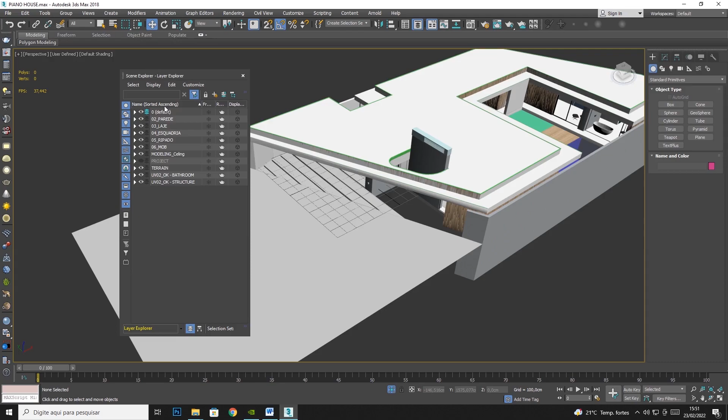It's really interesting to work in an organized way. So let's get started. First thing, we can put everything inside the default layer. We can erase all of the incorrect layers. Let's get started, let's do it.

Let's select all the project, clicking and dragging. Look at this, this layer here is in blue, so I click on it. I can click both of them. That means the layer that I'm selecting, that is selected, if I create something here or anything here, this object will be created inside this layer. So this layer here is going to determine where I'm going to copy things.

So let's select this default layer, click on it, and then click right here, because this button is going to add to the active layer. Look at this, if I click here, this layer is active, so I click right here and that's going to add the objects to this layer. If I click here and click here, that's going to add the objects into this layer.

I'm going to close it to show that the things aren't in the other layer anymore. Right button, unhide all. Look at this, there's nothing to show, so I just erased the layer. Perfect, all the objects are inside here.

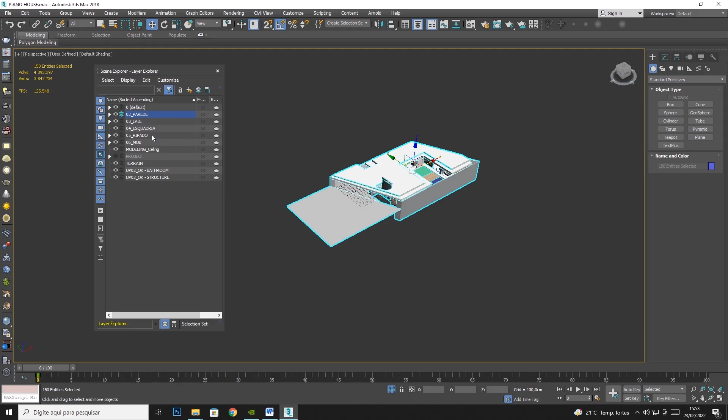Control plus Z, let's do it again. Okay, we got it back. Control plus Z. Look, I had these objects basically in all the layers, so you can see, I can click on it, the lining and everything.

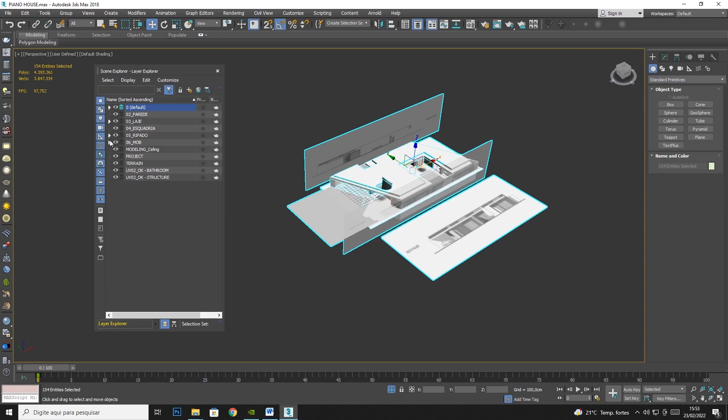So I'm going to select everything and put it right here inside the default layer. I select it and click right here, the button that adds to the active layer. Great, the objects aren't in the other layers anymore. I just don't know why we still have these little arrows here, but we'll check that out soon. Now that we don't have anything on these layers, I'm going to erase the main layer. Look at this.

Let's delete it. I'm going to teach you how to do it. Right button, delete. You can select more than one.

I can only delete if I don't have anything inside the layer. When I have this little arrow, I have something inside. So let's delete the other one. Right button, delete. Great.

Let's see what else we have. These three layers weren't deleted because we still have the little arrow here. Let me see what we have here.

Ripado - we don't have the object, so let's delete it. Right button and delete it. Right button, delete it. And the furniture...

Well, we don't have this, so let's select both and delete it. Control plus the other one we selected. Let's select both and delete it. Right button, delete it.

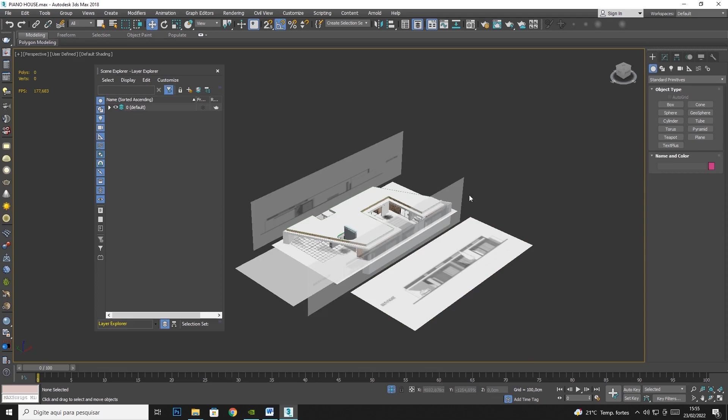Now I just have this default layer. Great, that's what we need. Let's get started organizing all the layers, starting with the textures that I used as references to model the project.

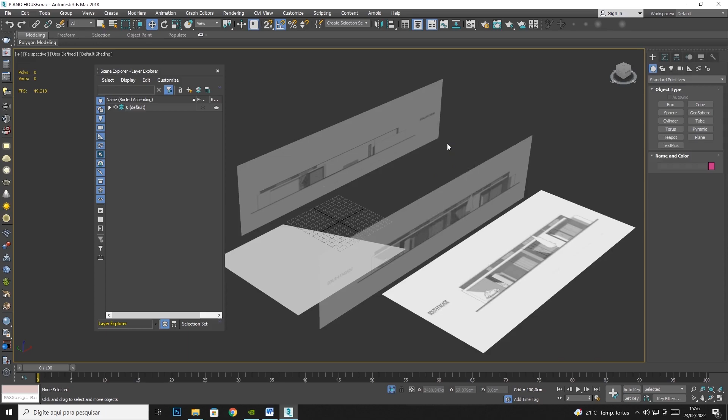I'm going to select more than one. Right button, isolate selection. When I click here, I only see the selections - just what I selected. Right button, unhide all, and I can do it again.

Let's select the textures here that I used to create this project. Then we can create a layer for them. Let's do it right now - select this, this, and this.

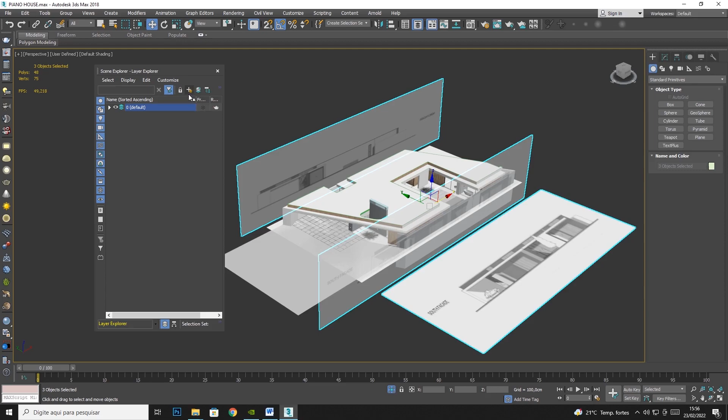We can click here, let's create a new layer. Now I'm not going to add, I'm going to create. So let's click here - yeah, we just created a new layer. Let's call it project.

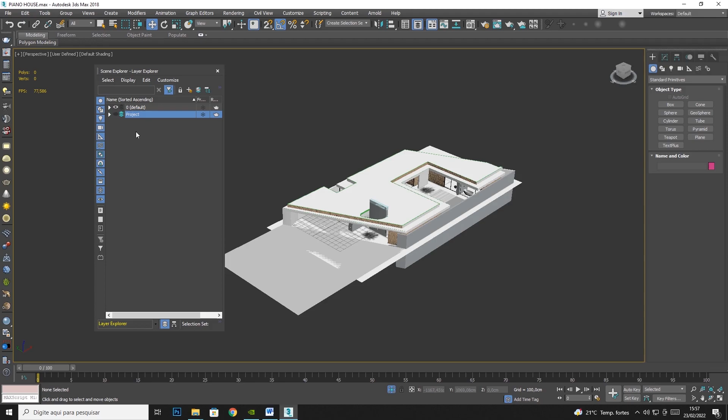Yeah, perfect, look at this. So I can hide the project, you know - so we just erased it. Let's see it like this.

We have another layer here. Let me verify this - right button, isolate selection, so that I can only see the object I selected. Okay, it's part of the project that I used to model, so let's add this layer here. Do you remember that? Click here so I can activate the layer.

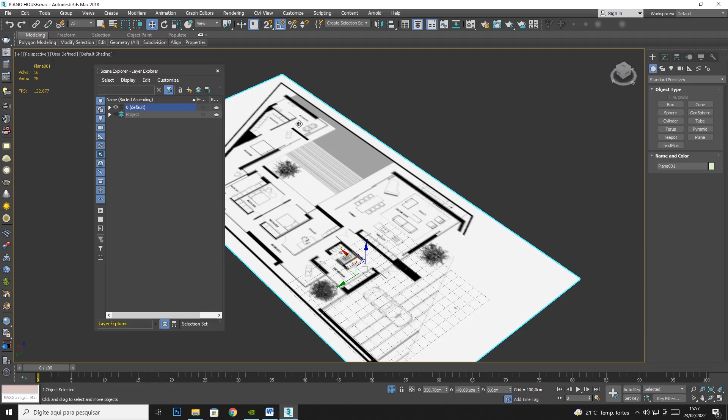Okay, I select the object. Let me make it smaller, and I want to add it to the active layer. If that makes sense, it's going to disappear because the layer is erased. Okay, so look at this, it has gone. So let me see.

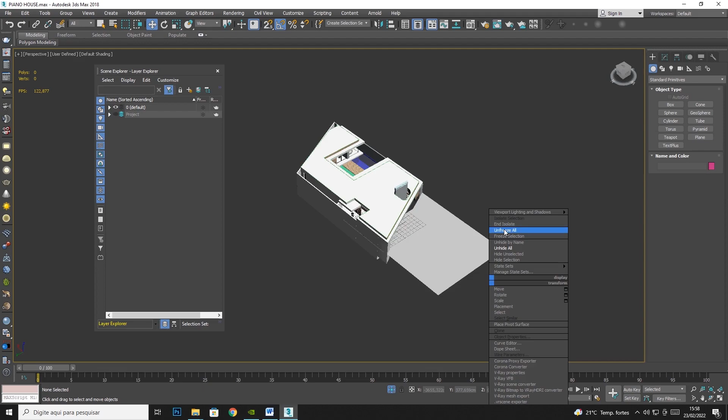Great, perfect. So now I have the project layer. Let's close it - right button, unhide all, or right button, end isolate. That makes the same thing. Let's keep going, organizing the file.

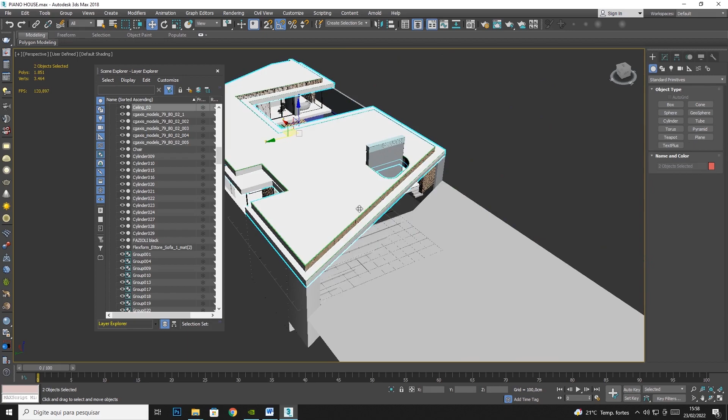Now let's select the ceiling right here, this one. With control, I'm going to select the one below, both of them. I'm also going to select this green element - we're using this to simulate the gutter of our house.

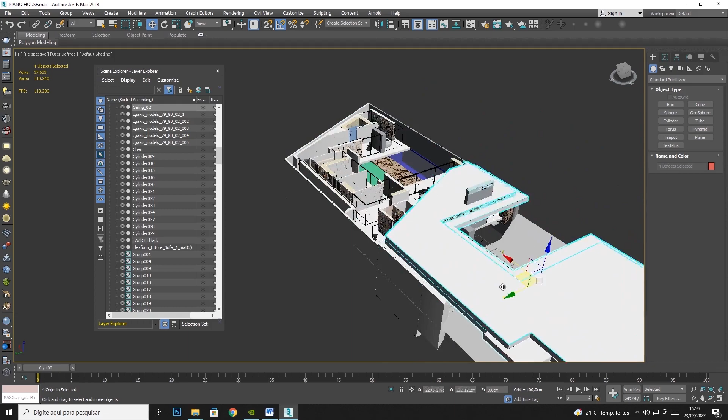All of this was ceiling. I think everything here I can consider ceiling, plus this element here - control, I can select this as well. Cool, let's create a layer for this.

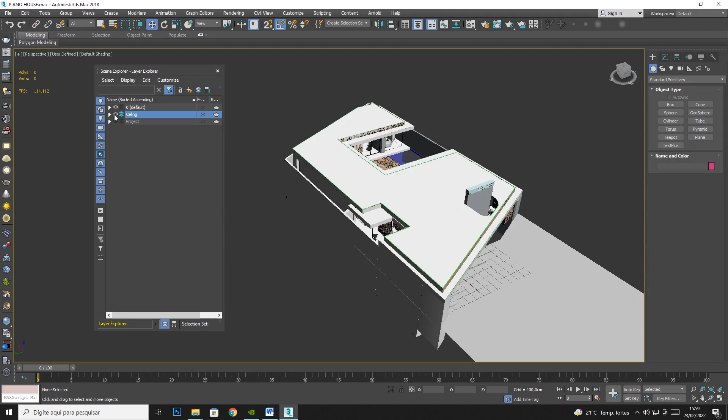I'm going to click right here, create a layer, and call it ceiling. Okay, let's write this - ceiling. Great, let's erase this. Now I can see or not see the ceiling.

Perfect, let's keep going. Another element we can create is the floor. We can select this little sidewalk, indoor floor, outdoor floor, the outdoor area that we're going to put grass on. Unreal, you don't have to worry about it now.

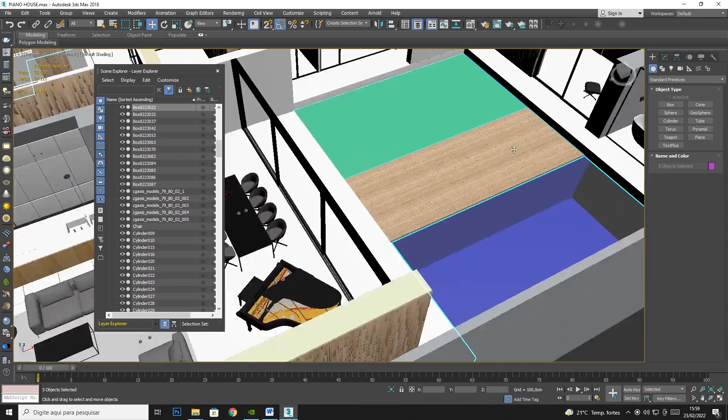We have this slided element that looks like an edge. Let's select this swimming pool, the water of the swimming pool, the area underneath the swimming pool. Let's see, everything's there, let's remove this. Look, I think of floors, I think it's okay.

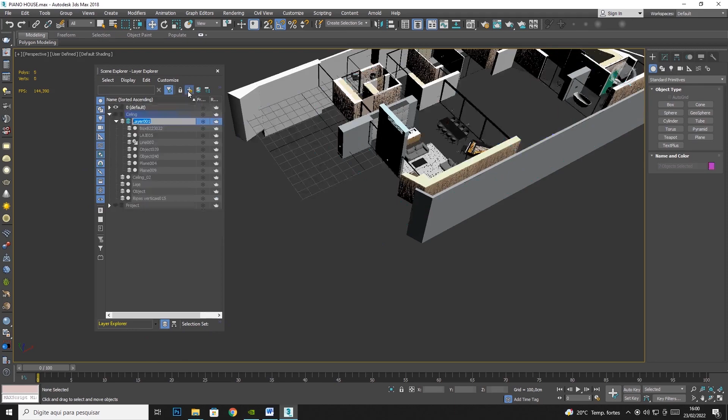Let's create a layer for this - create a new layer. Oops, look at this, it has created inside ceiling because ceiling was selected. Click here, Control plus D, select default.

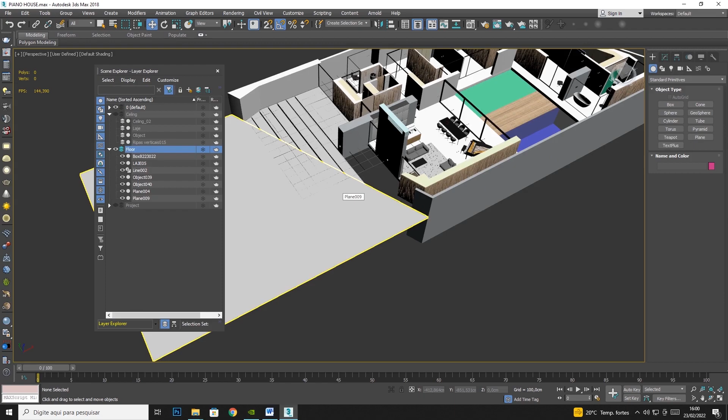The objects were selected - look at this layer. Floor, yeah. Great, let's erase this layer. Cool, we are organizing the file.

Other objects we can save are the masonries at the wall. This one, I think we can take this. We can try to take this little wood pieces - we can consider them as walls.

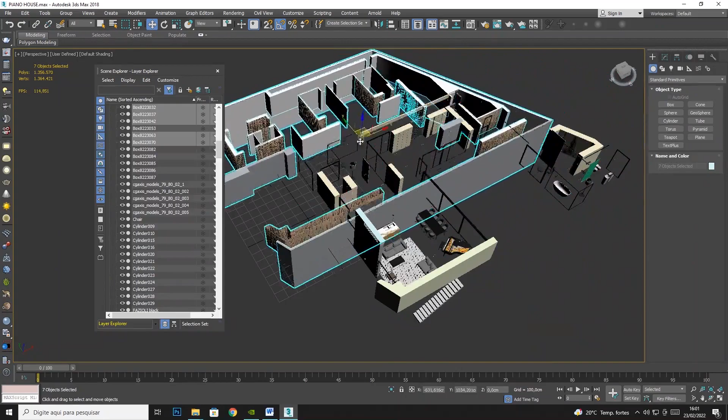Look at this, let's move it to see what we took. You can see, yeah, great. Let's create a new layer. It's inside floor because it was selected.

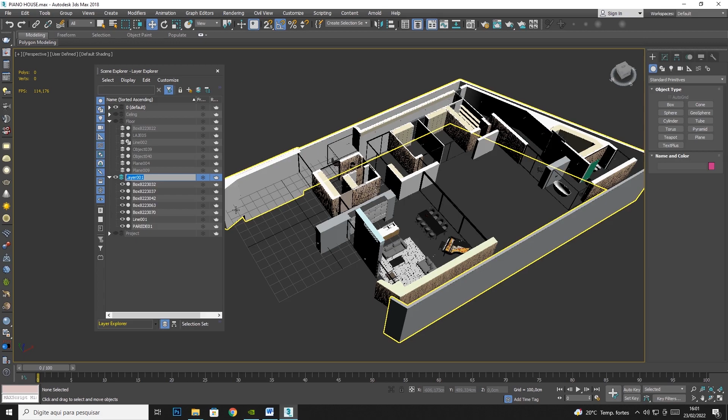Let's click right here and Control plus Z, default, create a new layer like this. Rename it - wall. Yeah, let's call it wall. Okay, great, almost done.

We missed this wall here. How can we put it here? Let's see if it's active. Select the object - let's verify if it's active, and add it to the active layer like this.

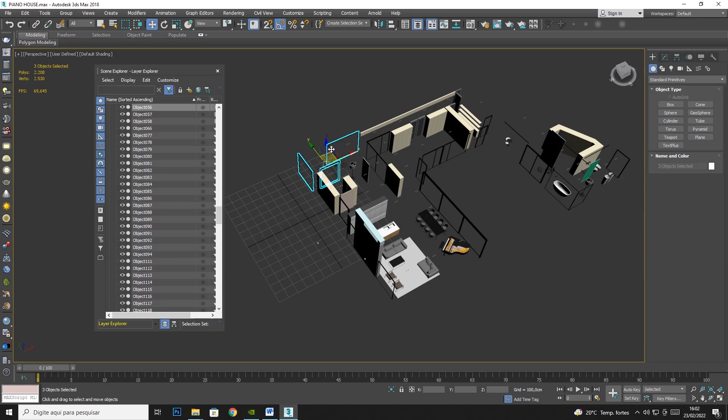This one as well. What else? Now we can take the frames. Let's select them right here, or you can try to press Control plus key, but as it was created in a different form, I cannot select everything. So let's select this in an individual form like this.

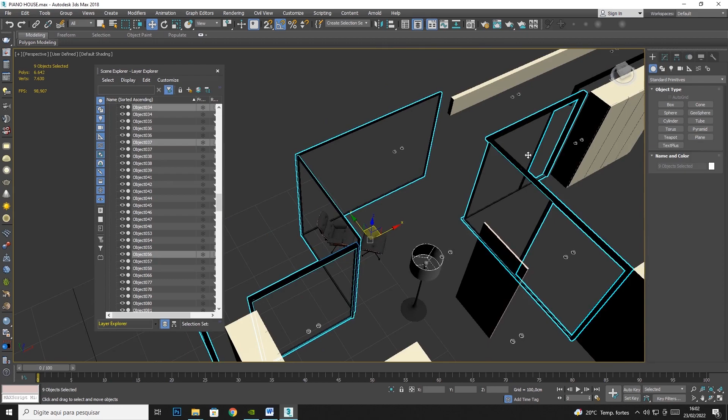Let's click right here and drag it. Okay, I can take more than one object. Same thing here, you see, here, and here. And I think this one is as well.

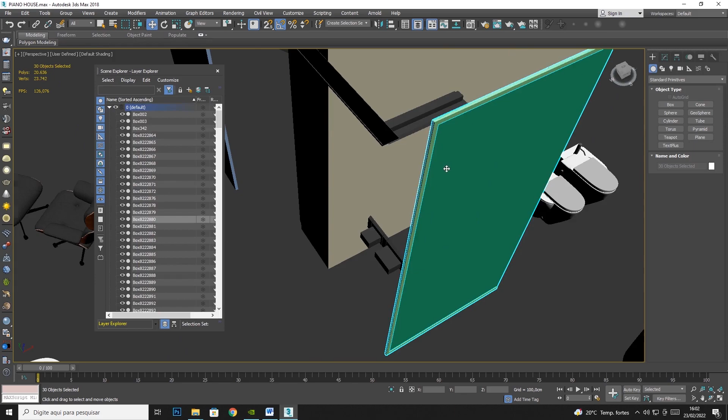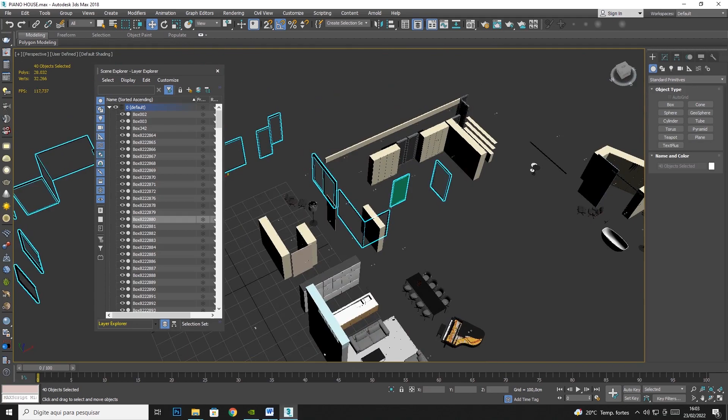This is the glass of the bathroom stall. This is from the living room. These two, yeah, I have more. Look at this, we have more, this one. I think there are just a few more. Let me see, we have this.

Press Ctrl plus Z so that you won't get out of your position. Let me see, I think that's it. Oops, there's this one and this one.

We can name it frame. Let's create a layer. Let's select this, default, create a new layer. Again, frame. Yeah.

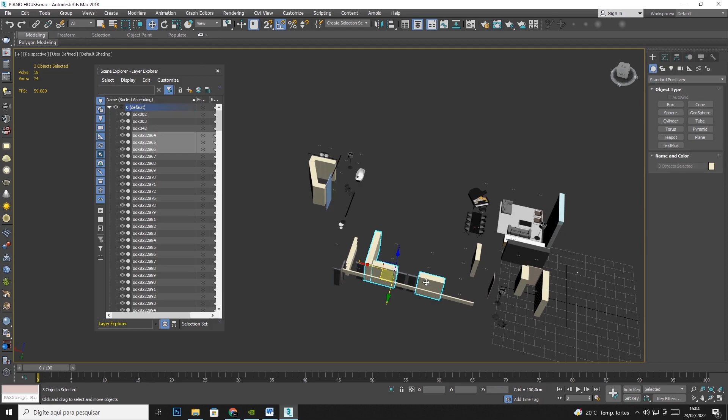Great, I can erase this. Now we're cleaning the file. Next objects are the furnitures. I think it's okay to take this, that, the wardrobes, this one as well.

Let me see, I think this is a door. We can verify this after. Let's just leave it here. I think this is a furniture. This is a wall.

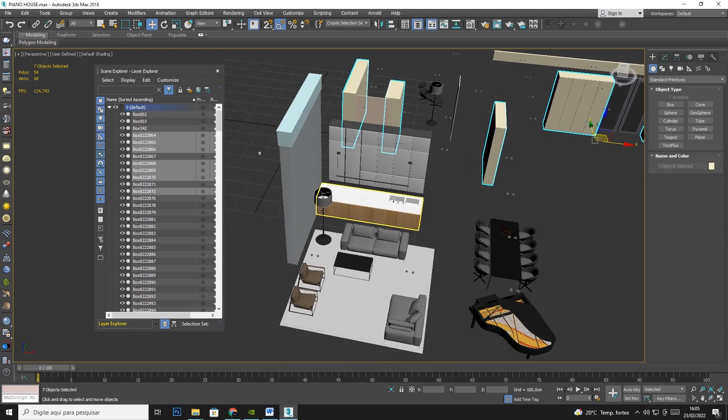Let me see, we have this one left. Right here, let's move it. We have these parts here missing. This one, this one, that one.

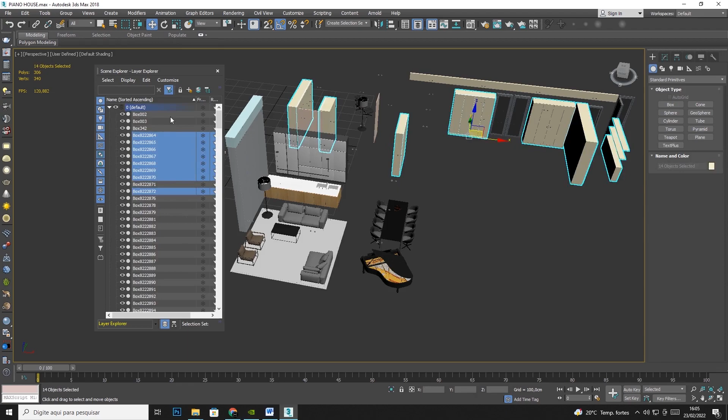I think that's it, let's create a new layer. Inside layer, default, create, and let's call it furniture. Furnitures. Yeah, perfect. And now let's add the other ones, the other furnitures.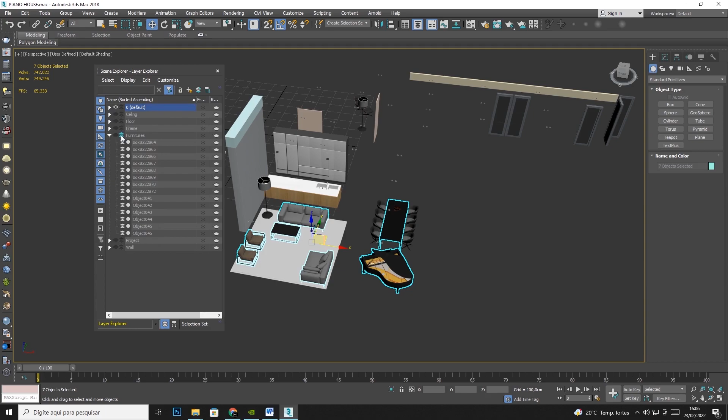Active layer, little chairs. Look at this, let's verify if it was selected. The frames, the layer, furnitures. Oops, but I deselected this, so let's select it. Selected furnitures here and take it to there.

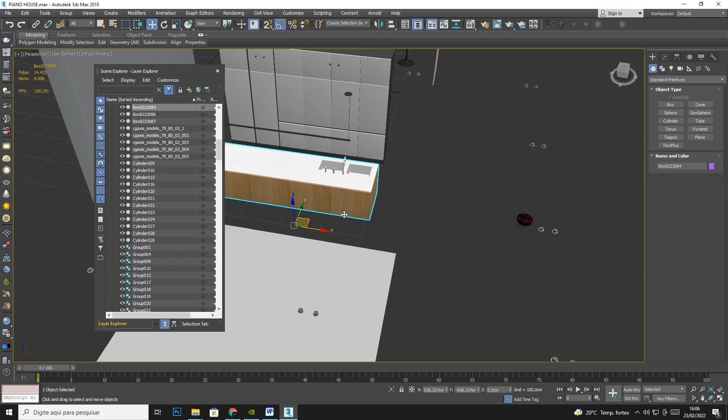The little chairs. The piano bench. Yep. Great, the sink. Oops, I think it's better if we attach these two elements.

Okay, let's click right button here and here. So we're going to work with polygons. I'm not going to talk in details because this course is not about modeling, but I'm going to explain how we can attach. Inside 3ds Max, it's called attach, okay?

So I want to attach this baseboard here. It's gonna ask if I want to add the ID. ID is a name that we have inside 3ds Max for the materials. It's a type of identification, okay? Let's suppose inside an object like this, I have a lot of different IDs.

We will talk more about it in the material class, but let's talk a little bit about it here. The IDs are a way to identify each material that I have inside a modeling, okay? If I have more than one material applied to the same model, I will have multiple materials, and I can identify these materials with a number. This number is the ID, the identification number.

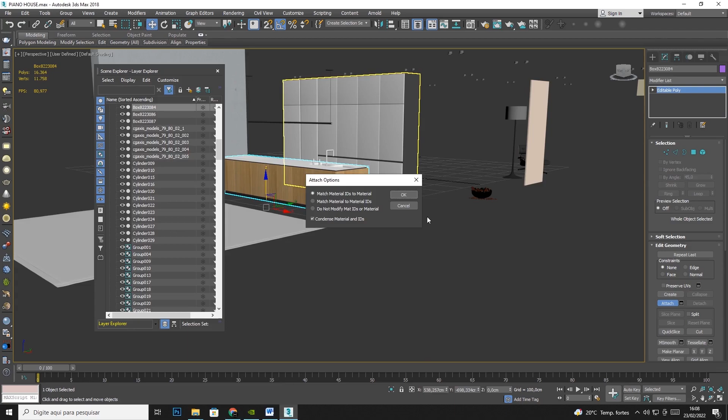So the software is asking, while attaching the baseboard to the sink, if I want to keep the ID number, and if I want to assign the ID to the material. Yes, we want. Okay, cool. Now everything is only one object.

Look at this, so it's a furniture. Go to the layer, furnitures. This one as well, I can consider as furniture, like this. It's basically the cabinet of the kitchen. This one is...

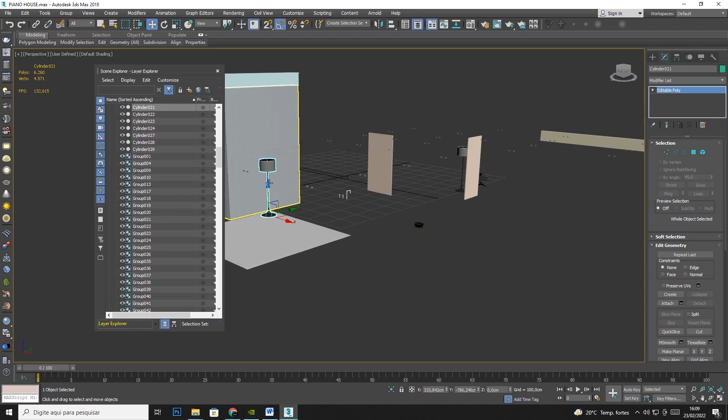Is a furniture? No, it's just a decoration. Okay, we already created a layer for it. It's a furniture. Let me see this one as well. We have this little shower, little faucet.

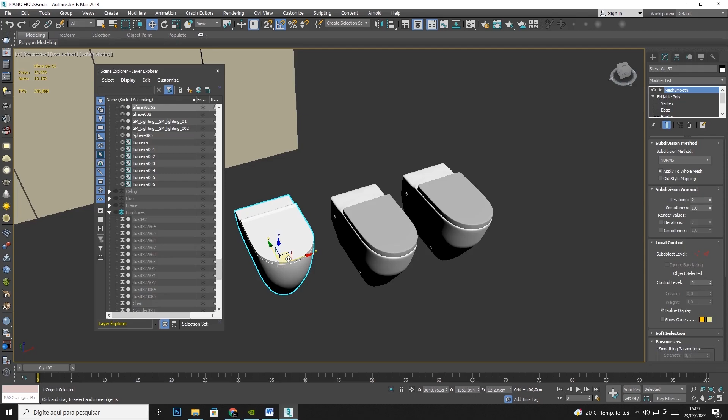Well, actually we have two, but we can delete one here. Let's delete this. Let's delete this as well. But it's beautiful, right? Let me see, I don't know which one we can keep, but let's delete this and let's keep this too. Yeah, let's keep this too, and let's send it to the furniture.

This sink also to the furniture. Let's attach this to this. Oops, no, that actually is just a residue from another material, another project. I think this was used as a reference to model.

Cool, this one can be a furniture. This one as well. Let's see, this one, it's a decoration, a little table. Okay, this one is a decoration. This one as well, a little foot of the table. Cool, meanwhile, it's okay, some door of wardrobes.

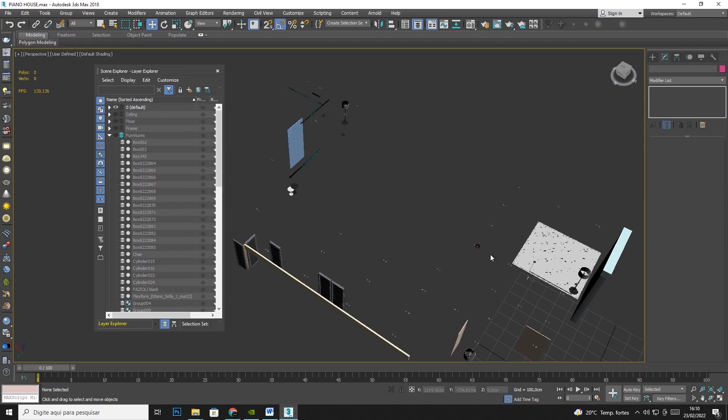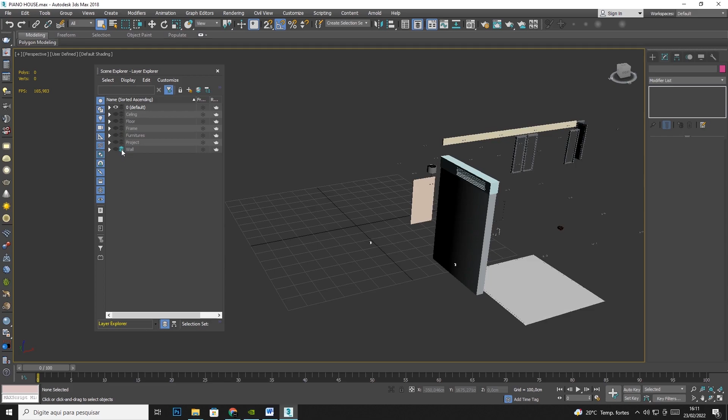This one, we have to get it back to the scene so that we can see what it is. These two are walls, yeah, let me see. Yeah, look at this, it's a wall, but it's not on the wall layer. Okay, so let's set it there. I'm sure this one is a wall as well. Let's set it to there.

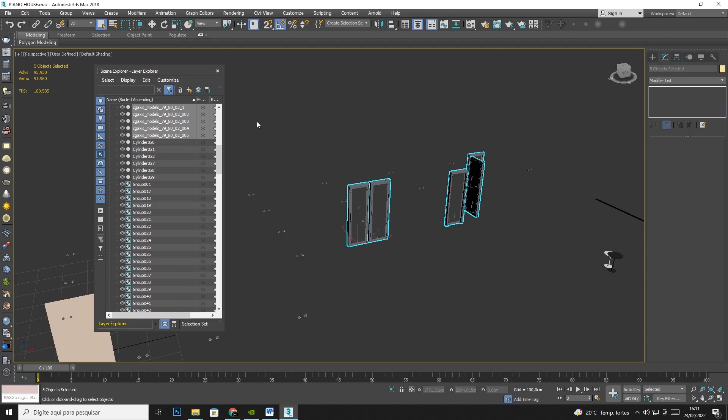More frames. Let's send to frames, I think, or maybe doors, but we can consider it as frames. Yeah.

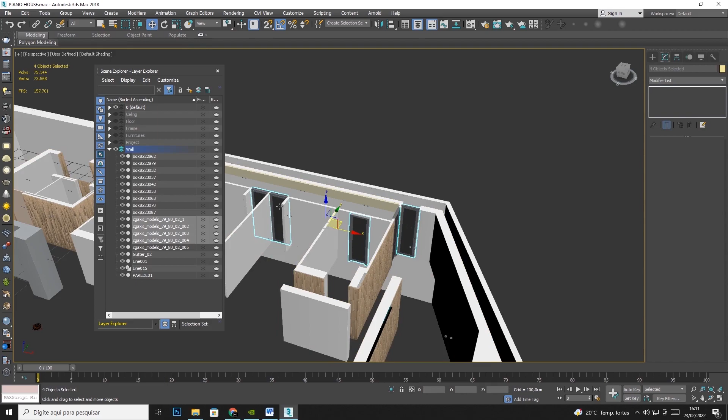This is a little wood we can put in wall. That is also a part of it. Oops, I think I sent the little doors to the wrong place. I was supposed to send it to the frame, but I sent it to the wall.

Now let's see this frame. Okay, let me turn off the default. There's something lost here. No, let's just close the wall. This is the decoration. Let's create a decoration. Let's go. Let's create here default.

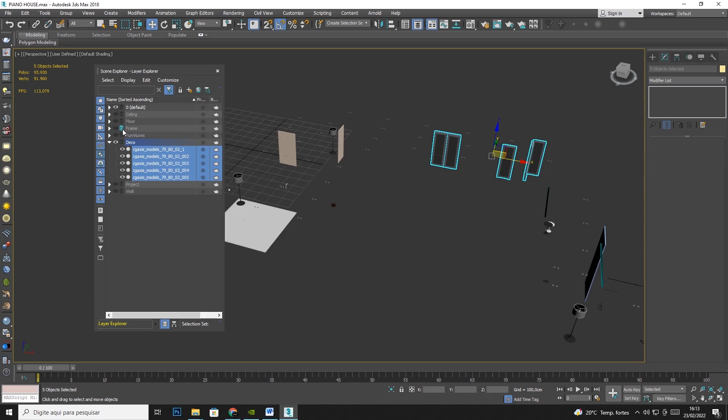Let's call it... let me save it. Decoration. Yeah, we have this element. Okay, we have this. It is here, let's send it into the frame. Yeah, because I think they were in frame. Deco is empty, so let's put the objects inside decoration.

Carpet, this little table, lamp, the faucets. Let me see, this little thing here, this sink faucet. This light fixture we can leave with the lamps. I think these are the decoration elements, the layer deco. Let's activate and send it. Close it, let's see if it went.

Yeah, cool. Let's see the objects about illumination. Let's select them. Select as well. That's it.

For those who don't know what a grouped element is, it means I have a lot of different objects, and I click on one and it's going to select all of them because they are grouped. And if I check the name, it's group 66. When it is in bold, it identifies that this object is grouped.

I can keep it grouped, or I can click here and ungroup this object. Look at this, so now it's individual. Group, ungroup, and now it's individual. Each one, I can select individually. Let me see if there is more group.

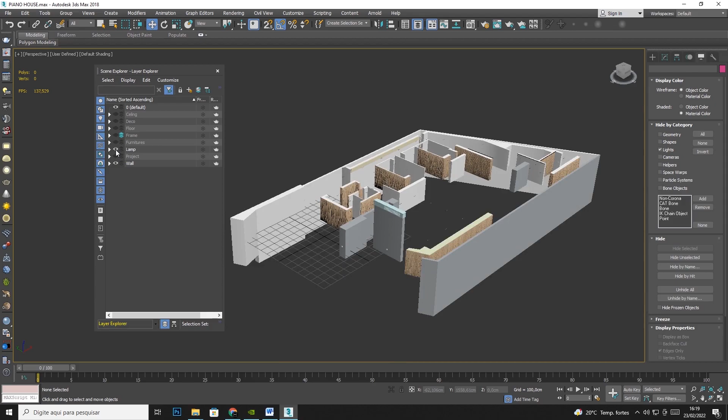All the objects that were here now are separated into the other layers, for example walls, just walls. Project, lamp, look, furnitures, frame, floor, decoration, you know, look at this, and ceiling. Interesting, right? Cool, perfect.

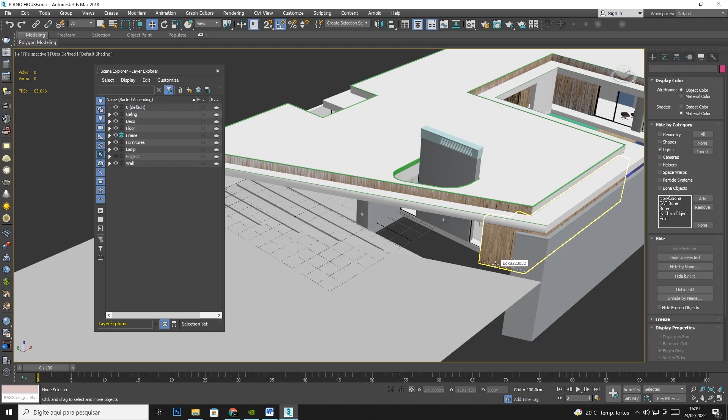Some elements are missing, for example some holes, don't worry about it, we will add them on Unreal. There are a lot of things we're going to make inside Unreal. I'm gonna finish this class where we learned how to create and organize the layers. That way it's going to be easier and organized to send the files to Unreal. I'm gonna finish this class. See you in the next class.